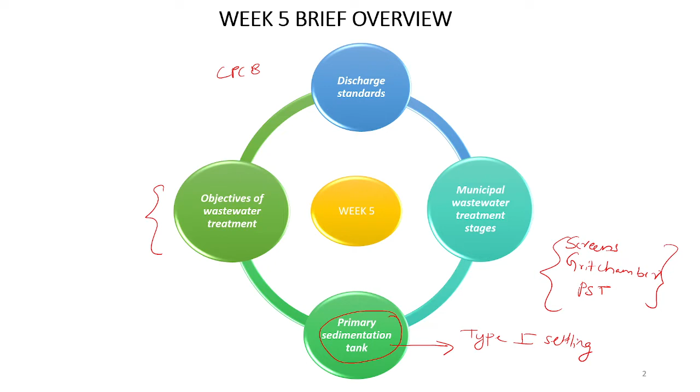Now let us move on to the problems. Here we have the first question. I need participation from your side. Please kindly note that this is an interaction session, so you are free to mark your answers. Don't be shy to share your views, answers, or concerns. Let us see the first question.

First question: Factors affecting sedimentation process in a sedimentation tank are A. Particle properties, B. Fluid properties, C. Detention period, D. All the above. Any answer, anyone? It is D, all the above. Okay, let us see the answer. Yes, it's correct, all the above.

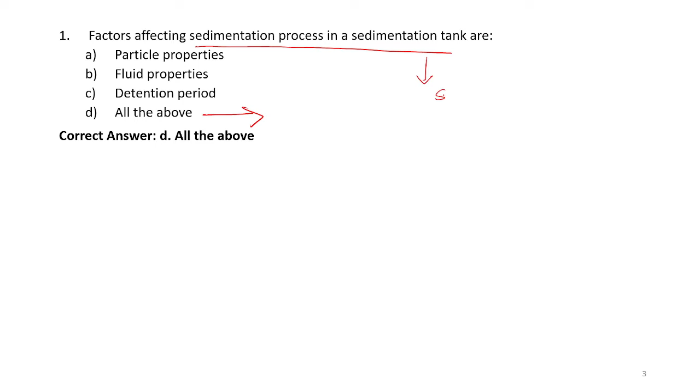You would have learned about the sedimentation process in a sedimentation tank, particularly this physical settling process, which is predominant in primary sedimentation tank. You would have learned about type 1, type 2, type 3, and type 4 settling. Based on what factors affect this physical process of sedimentation, particle properties play an important role in particle settling — properties like density, size, shape, etc. These factors play a crucial role in how much time they will take to settle, or whether it will settle or not. The next thing is fluid properties.

Obviously the medium in which the particle is settling matters — for example, the density of water, we normally take as 1 gram per cc. It won't be the same for the sewage water we are talking about. The density would be different, so the settling characteristics of the particles would also be different. So fluid properties play a crucial role.

The next thing is detention period. Detention period means that sometimes settling smaller particles needs more time than settling larger, denser particles. So detention period also plays a role in the sedimentation process or the efficiency of the sedimentation process. Hence the answer is D, all the above. I hope it's clear for you. If there is any doubt, you can ask, else we will move to the next question.

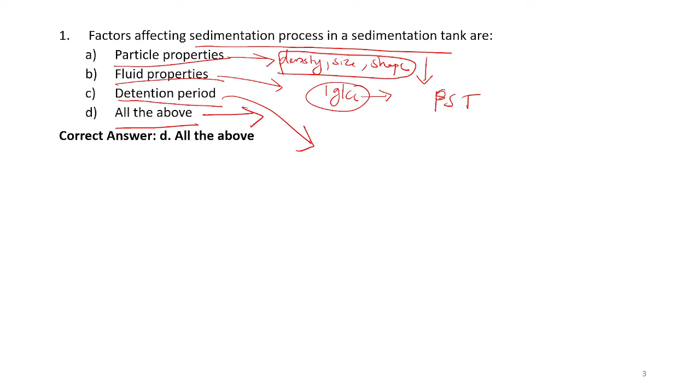Since there is no concern from your side, let us move on to the next question.

The next is a match-the-following type question, where you have to match pollutants on the left side with the corresponding treatment unit on the right side. On the left side you have gravel and sand, scum and foam producing matter, and floating and suspended matter. On the right side you have bar racks, grit chamber, and fine screens. Some options are given regarding the match. I request all of you to try this question and share your answer.

Any answer, anyone? Okay, let us see the answer then.

So the answer is D. A against 2, that is gravel and sand matched against grit chamber. B against 3, that is scum and foam producing matter against fine screens. And floating and suspended matter against bar racks. So this is how it is done.

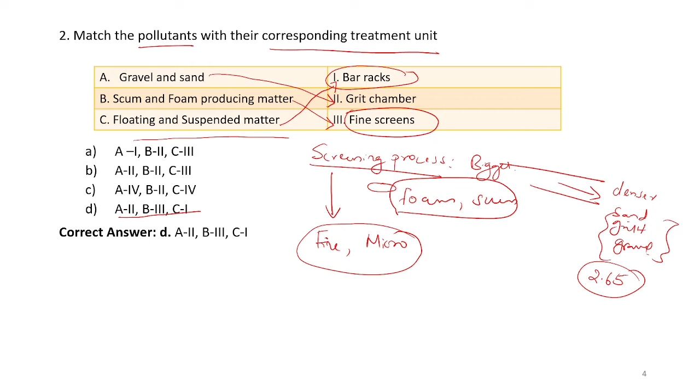So let us see the next question. The next question is: which of the following statements are true? Option A: screenings are often disposed of in sanitary landfills. Option B: screens and grit chamber are examples of unit operations. Option C: a comminuting device shreds coarse solid materials and returns them to the wastewater flow. Option D: all the above. You are free to mark your answers.

Please say out your answers. Ma'am, we are all answering in the chat box. Okay, since I'm sharing the screen, I'm really not able to see the chat box. If I'm going to see the chat box, that's an issue. So we'll give our answers here right now. Okay, thank you. So if you tell the answer directly, then that would be fine because I will be able to know the answers.

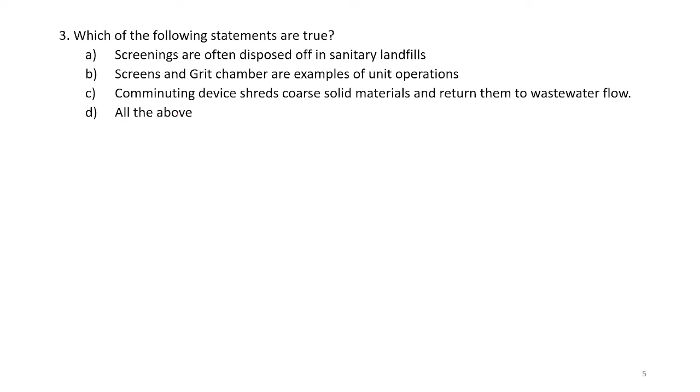Most of us have answered D. Okay, thank you, so D is the popular opinion. Let us see the answer. Yes, that's correct, very good. So D is correct. Let's see one by one.

These statements are taken from the lecture notes or the PPT taught in class. These are statements taught in class, and I have taken them from those lecture notes about each process. So first, let's see screenings.

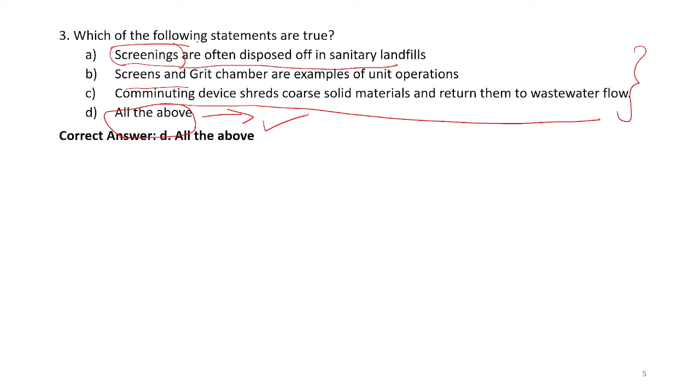Screenings refer to what all things are removed by the initial screening process - all the floating objects removed during screening are known as screenings. Option A says they are often disposed of in sanitary landfills, which is true. Most of the floating objects removed in screens are often buried in sanitary landfills, so option A is correct.

Then option B says screens and grit chamber are examples of unit operations. Let us see that. In the lecture video, there are two terms used: unit operations and unit processes. Can anyone say what is the difference between these two?

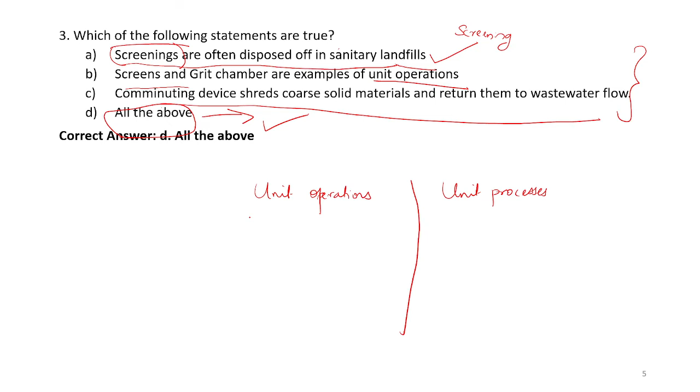Very good. Ma'am, what is meant by grit chamber, ma'am? Yes, okay, I'll come to that now.

Grit chamber is an example of unit operation in which, soon after you have a stream of wastewater entering the wastewater treatment plant, you have big floating debris, then particles having specific gravity greater than 2.65 - heavier particles like sand. Grit means those type of particles which are very inert in nature. The term we should use for grit chamber is inert material, meaning inorganic material. These particles which are dense and inert get easily removed by the physical process of settling. So for that we go for a treatment unit called grit chamber.

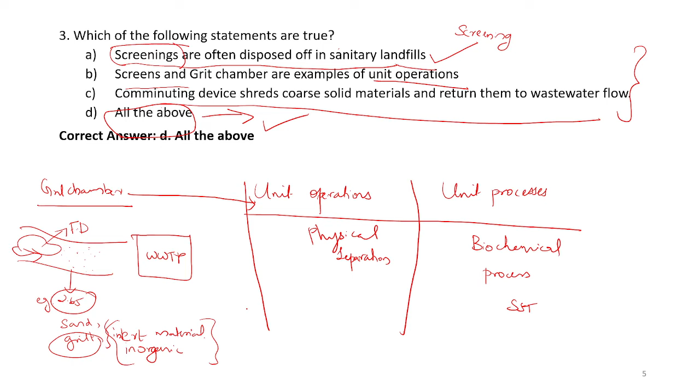Okay ma'am, thank you ma'am. Okay, which is based on the design you would have learned in the NPTEL video. Design is based on the Stokes equation and all, so please go through that design part. I hope it's clear for you now. Yes ma'am, okay thank you.

So let's come back to unit operations and unit processes. Unit operation means all those treatment stages in which the prime mechanism is physical separation, like settling - nothing biochemical happening, just physical processes. That is what is known as unit operation, for example grit chamber. Screening and grit chamber are examples.

Then you have biochemical processes in which you employ microbes to carry out biochemical degradation of your pollutant and subsequent removal. Those processes are called unit processes. So the second statement is true - screens and grit chamber are examples of unit operations, which is true.

The third option says comminuting device shreds coarse solid materials and returns them into the wastewater flow. This is also true, as you would have learned about this comminutor process - if even after screening some particles remain which are large and floating, there is a separate unit called comminutor whose job is to shred those particles into smaller fractions, and those shredded fractions will reach the wastewater.

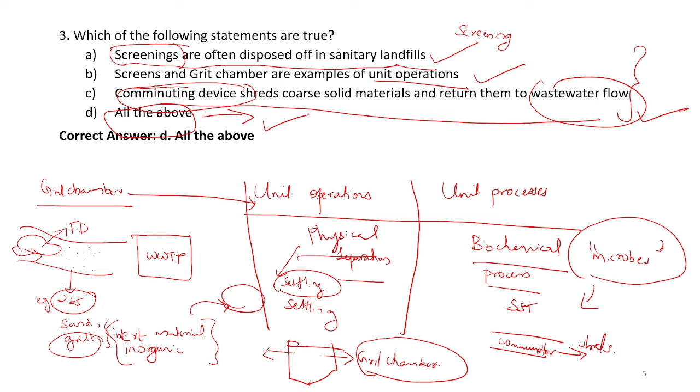The fourth question is: which of the following is used for dissolved organics removal? Option A, grit chamber. Option B, equalization tank. Option C, secondary sedimentation tank. Option D, primary sedimentation tank. So all of you please say the answer.

I know you are typing in the chat box, but I'm sorry I am not able to go back and see. Someone says D, primary sedimentation tank. Okay, any other lead, anyone? Another says C, ma'am. Okay, and any other answers? C, ma'am. Okay, so let us see the answer. The correct answer is option C, which you have said. Option C is the correct answer.

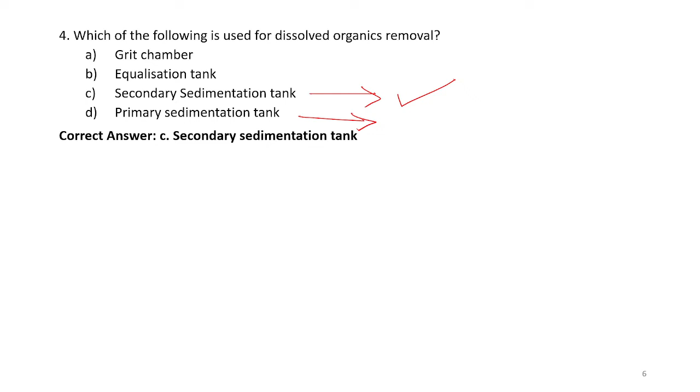So let us see what each process is for. The question is which of the following is used for dissolved organic removal. Let us see the grit chamber - I have just explained that, so I hope it's clear now. Next we have the equalization tank - can anyone tell me what is an equalization tank?

Basically, it is used for collecting wastewater over a period of time so that the day variations can be adjusted in the tank. Yes, very good. So equalization tank means...

After screening and other preliminary treatment, the wastewater flowing into the subsequent stages, like primary sedimentation tank or secondary sedimentation tank, won't be in uniform flow rate. Sometimes in the forenoon the flow will be Q1, after some time the flow will be Q2, like that. There is a lot of variation.

Also, the concentration of pollutant varies. Say if the wastewater is from a pharmaceutical company, where the treatment plant is used for removing the pharmaceutical compound: when the flow was Q1, the concentration was C1; when it was Q2, the concentration was C2; and when it is Q3, it is C3. So there is a lot of variation.

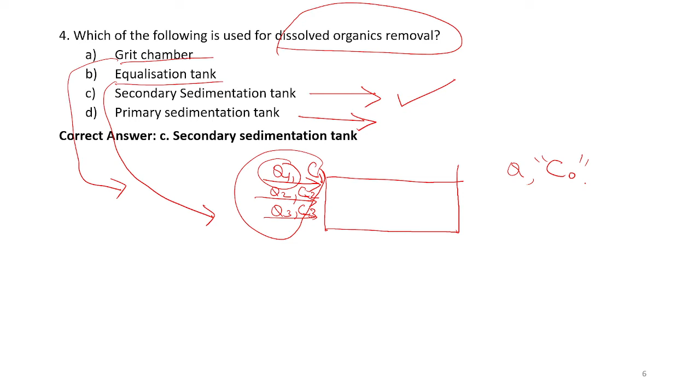Usually we design the treatment system for a particular flow rate and to treat wastewater having concentration C naught. So it's actually rough — we cannot design any system precisely to treat a concentration when the influent keeps varying. But if there is huge variation, it becomes very problematic.

If it is directly coming to the secondary sedimentation tank where there are microbes, and sometimes the concentration of pharmaceutical the microbes are exposed to is C1, sometimes C2, then the efficiency of the system will be very low.

So in order to address this variation, there is a separate tank or storage unit called the equalization tank, in which the incoming wastewater is stored for a particular time period to equalize the flow rate and properties like concentration, so that the effluent coming out of this tank will have a uniform flow rate and other properties. Then when it reaches the subsequent treatment units, there won't be much challenge for treatment. I hope it's clear. Is it clear for you?

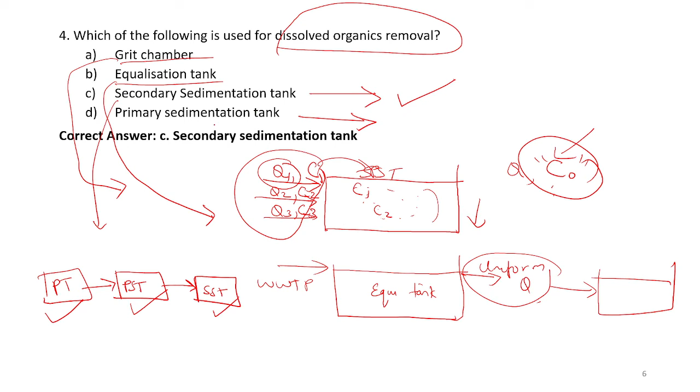Option D is primary sedimentation tank. It is a physical unit operation, so only settling is happening there. Biochemical processes are not expected to occur, though about 20% of BOD removal and so on will happen, but it is not designed for that.

Hence the answer is C. Some of you said option D, which is partially correct, but we cannot give credit for that because it is not designed for the removal of organics. It is designed just for the settling of settleable suspended particles. Is it clear for you?

Guys, please respond. Ma'am, I have one doubt. Yeah, ma'am, yes, yes, please go ahead. This secondary sedimentation tank — is it a unit process or what do you call it?

Actually, since the biochemical process is involved, the secondary sedimentation tank is a part of what you'll learn in subsequent classes as the activated sludge process. So though the settling of biomass occurring in the secondary sedimentation tank is a physical process, since the biological system or microbes are involved, it is classified as a unit process, not a unit operation.

Okay, so shall we move on to the next question? Yes, ma'am.

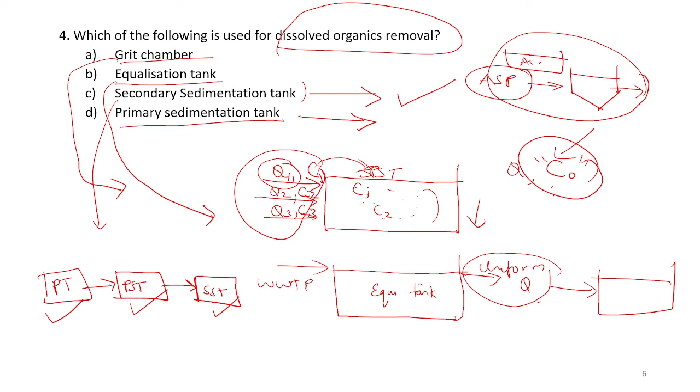So the next question is: type 1 settling is also known as A. discrete settling, B. flocculant settling, C. zone settling, D. all the above.

Any answer, anyone? Is it A, ma'am? Yes, that's correct. Option A is the answer.

So in the lecture video, you all would have learned about different zones of settling in the NPTEL videos. So can anyone tell what are the four types of settling which is prominent in wastewater treatment?

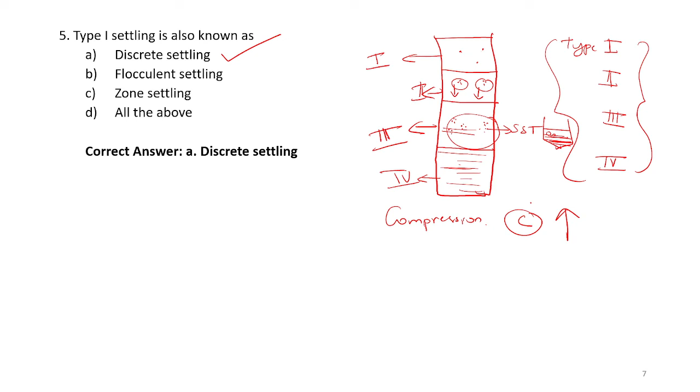The fourth type of settling is compression settling. In compression settling, the concentration of particles is very high, so different layers are compressed, one layer over the other. It is like a congested type of situation for these particles. It is found in the lower depths of the secondary sedimentation tank.

So these are the four types of settling. I hope it's clear for you. Any doubt? Shall we move on to next question? Yes, ma'am.

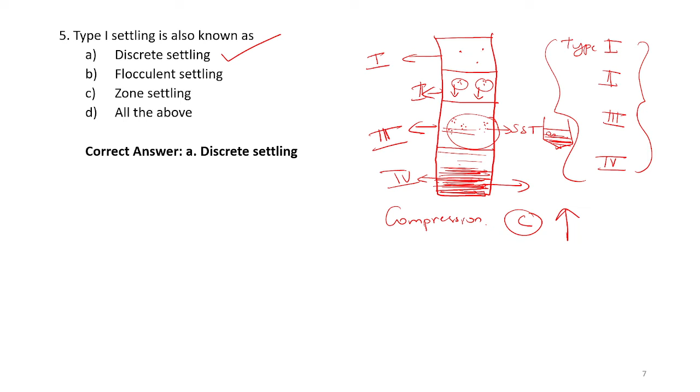So the next question is: 100% collection efficiency of particles of specific diameter in a settling tank is obtained when? Option A, particle settling velocity is higher than critical settling velocity. Option B, particle settling velocity is equal to critical settling velocity. Option C, particle settling velocity is lower than critical settling velocity. Option D, both A and B.

So anyone know the answer? Option D, ma'am. Option D. Option C. Any other lead, anyone?

If not, let us see the answer. Option D is correct, both A and B. So in this question, we are talking about a primary sedimentation tank.

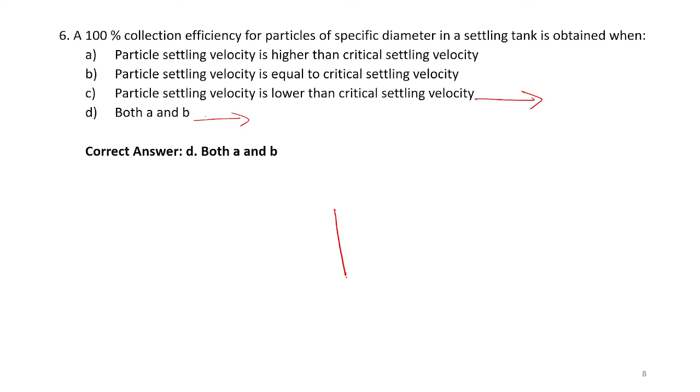So in the lecture videos, I hope all of you would have gone through it. You would have learned the term critical settling velocity, and seen the derivation that critical velocity will be equal to the surface overflow velocity VO.

So you would have learned that in the settling of particles, if a particle is hitting the bottom before the detention time t, that particle will be removed. Similarly, even if the particle's trajectory is at the bottom or in the middle, not necessarily at the top, if it is getting removed before it flows out, then that particle is removed in the primary sedimentation of the wastewater.

So you would have learned about the term critical velocity, which is equal to overflow velocity. If you have an overflow velocity VO, defined as the flow rate Q divided by the surface area of flow, which in this case is Q by L into B, length into breadth, this is the area we take. We have seen the derivation in the lecture video; if not, kindly go through that.

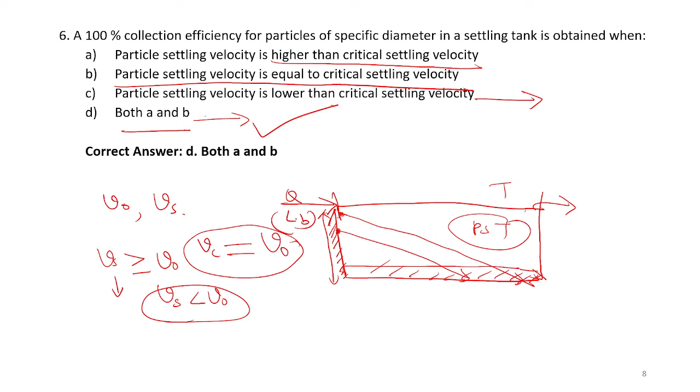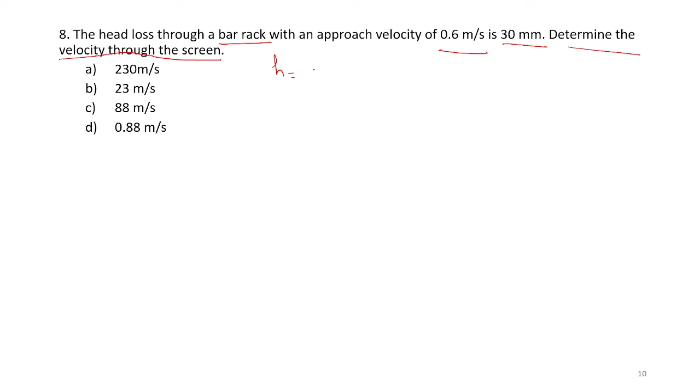23 meters per second, ma'am. 23 meter per second, okay let us see. Can you hear me? Yes ma'am. Okay. Any other answer, anyone? Anyone else trying, or should we see the answer? I guess nobody else is trying, so let us see the answer. Answer is 0.88 meter per second.

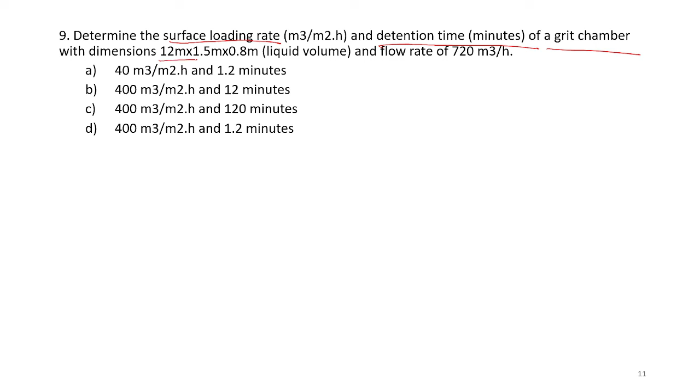So this is all about this question. Let us see the next question, which is also a numerical. This is one of the important questions which will come in your assignments frequently. Such type of question it is. So let us see: determine the surface loading rate and the detention time in minutes of a grit chamber with dimensions 12 meter into 1.5 meter into 0.8 meter and flow rate 720 meter cube per hour. So detention time should be in minutes, surface loading rate should be in meter cube per meter square per hour.

So what is given is that the tank dimensions are given and the flow rate is given. All of you please try this out and let us see the answer. I'll give you about 3 to 4 minutes. Meanwhile please try this out.

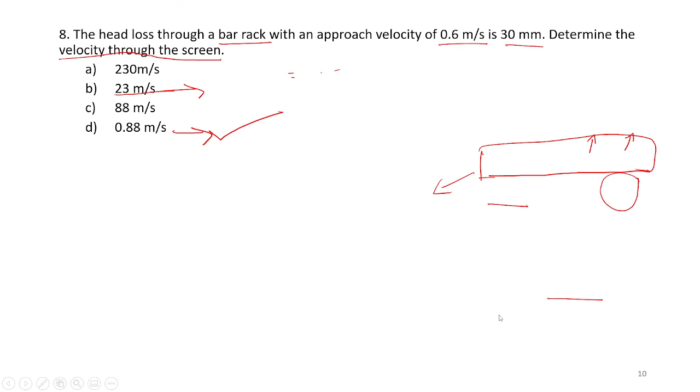Ready with the answer? Do you want more time? Or should we start discussing? Do you want more time? Hello? Can you start discussing? Okay sure, so let us see the answer.

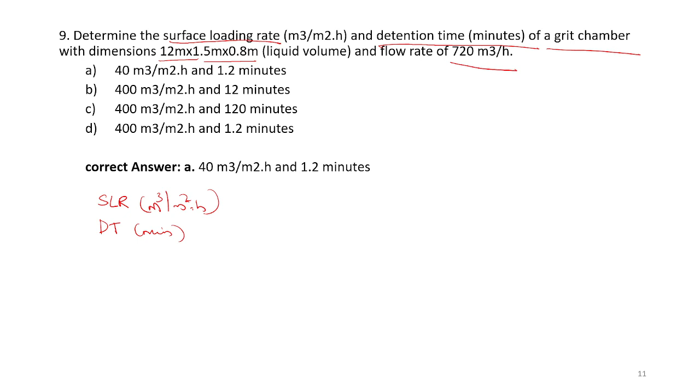The answer is option A: 40 meter cube per meter square per hour and 1.2 minutes. So what is given here is you have the surface loading rate, meaning you have a tank in which you have to find out the surface loading rate and detention time. Dimensions are given, flow rate Q is given as 720 meter cube per hour.

So first of all, surface loading rate means the flow rate Q divided by the area of flow, that is length into breadth. Again I am drawing it wrongly, it should be this area, meaning the flow per unit surface area, that is the definition of SLR. So you have Q divided by length into breadth, which is 720 meter cube per hour divided by 12 into 1.5 meter, which comes as 40 meter cube per meter square per hour.

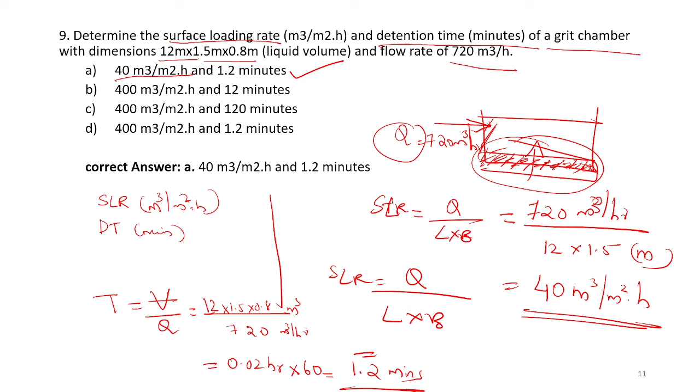So option A is correct. Is it clear? Shall we move on to the next question?

Yes, so this is the last question. This question is also very important, it often comes for your assignment and other exams. It says that a settling basin has a flow rate of 2000 meter cube per hour and has an effective settling volume that is 15 meter long, 3 meter tall, and 5 meter wide. What percent of particles that have a settling velocity will be removed?

This is related to that ratio which you have discussed, that is velocity of particle Vs divided by the critical velocity Vc or overflow velocity. So this is the hint. Please try this out and let us see the answer.

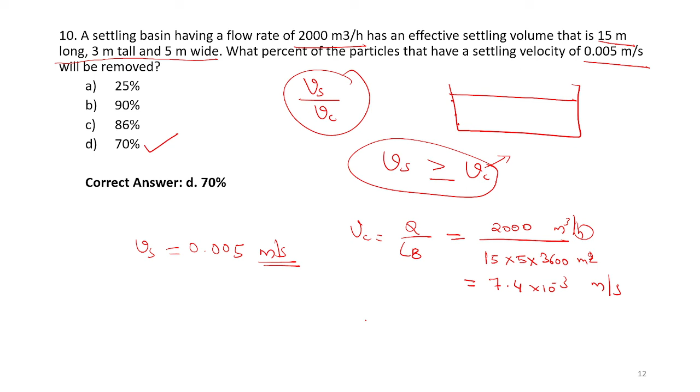Now we have to find the ratio Vs by Vc, which is equal to 0.005 divided by that, which comes as 68%. So 70% is near to this answer, so we have taken option D as the correct answer.

Any doubt, anyone? Any doubt?